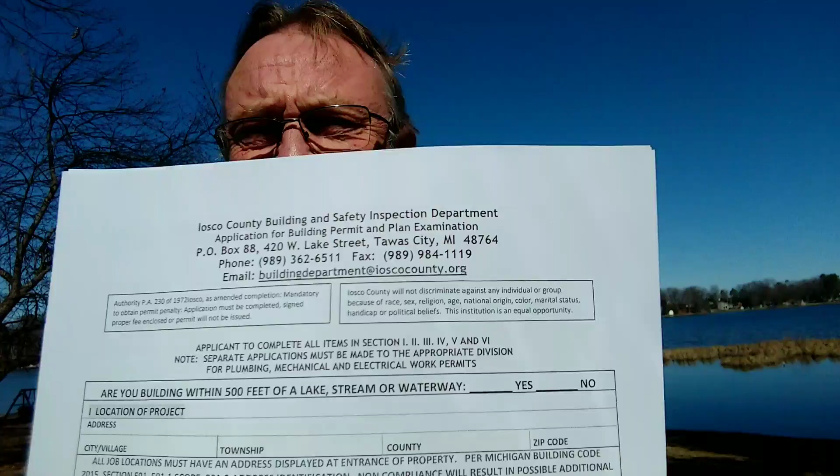So what we're going to talk about first here is the actual building permit. So this is what I got online, and it's from the county right here. And it asks you some various questions, all pretty simple. The address of where you're going to be doing the work. It's going to ask you if it's 500 feet from water, and it is. It's going to ask you who the contractor is. That's where you would put yourself if you're doing it DIY. The architect, yourself. The type of construction is going to be a deck, so on and so forth.

Now here's the one thing that I can warn you about, and that is I would strongly advise you against pulling a permit as a DIYer and having someone else do the work, because you remove all the liability from them and you put it all on you. So if something isn't done correctly, then it's kind of on you. Which is unfortunate, especially if they walk away because they made some mistakes and it's going to be too costly for them to come back and correct. So it's ill-advised to pull a permit for someone else to do work on your home. If they're licensed, let them do that, and then that puts the responsibility directly on them.

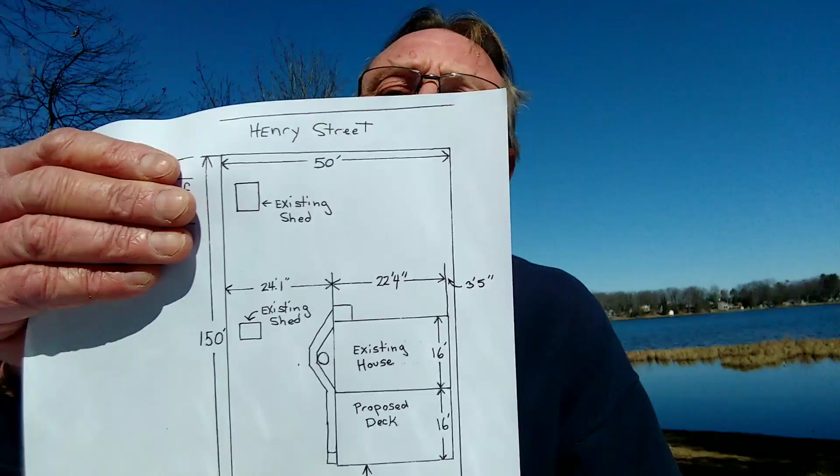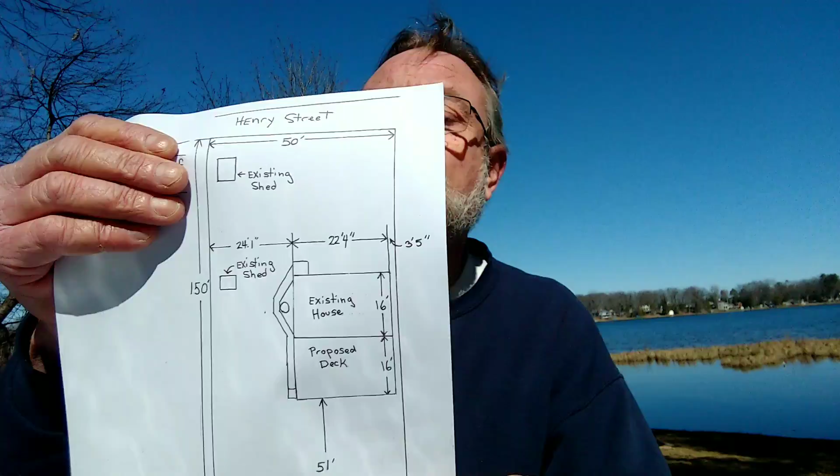So then the next thing that I did was I drew up a plot plan. And in the plot plan, it just shows the size of the property, the existing structures, which is the existing house, the existing sheds, and then the proposed deck, the distance of that deck from the water. The zoning says that I have to be 40 feet from the water, and when I'm finished, I'll actually still be 51 feet away from the water. And of course the width of the property and how far I am off of the property lines.

I'm doing this outside because it's a beautiful day, so the wind's messing me up a little bit.

But this is the general plot plan to show the length and the width of the property, how far off the property lines you are with your structures, and what you're proposing to do.

And that's really all there is to that. That is not drawn to any scale, and it doesn't need to be. There's no requirement that says any of these drawings have to be to scale. Some of them I did partially do in scale, but footings and stuff like that I did not.

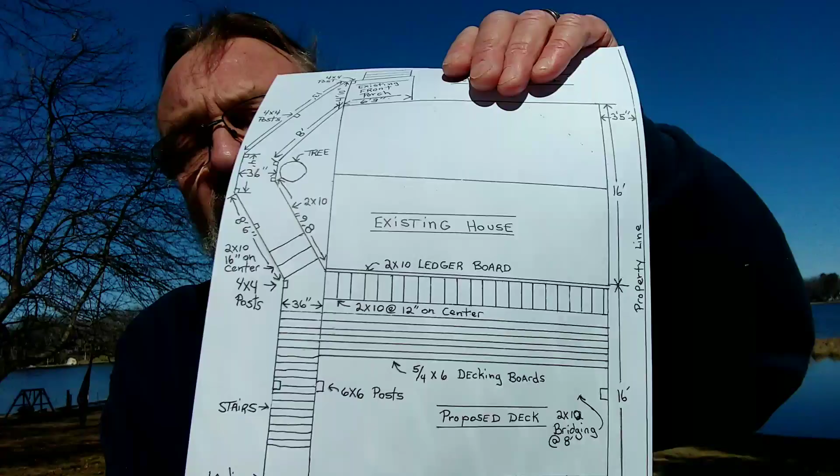So the next drawing that I did, and these will all have to be turned in to get the building permit, because it's going to show them how you are going to construct it and that it's safe for people to get on it. So the next drawing I did was the actual bones, or the main framework of the deck. And in that, I also showed them how the walkway was going to attach to my front porch. I have a tree right here that it has to go around.

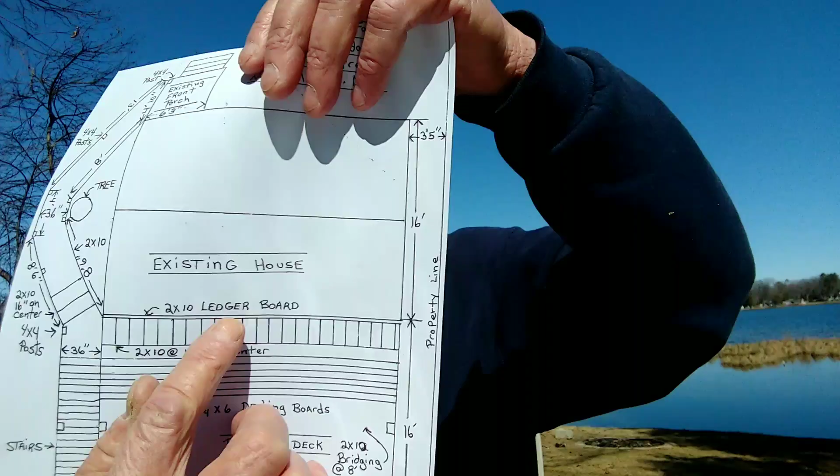I also show them here that I'm going to use a 2x10 ledger board fastened to the house. I'm going to use 2x10 joists at 12 inches apart. So if you're not sure, you can go Google different size timbers, such as 2x10s, 2x12s, and you can get what they recommend for their span, and that is pretty much a national code. It's not a state code. So in order for me to use a 2x10, I had to go 12 inches on center to span that

to 16 feet. Also keep in mind that wet weather timbers have a different span than dry timbers. So if this is a home construction, you can actually span a 2x10 further in a dry condition than you can in a wet condition. So keep that in mind if you're doing something like a deck or a proposed outdoor project.

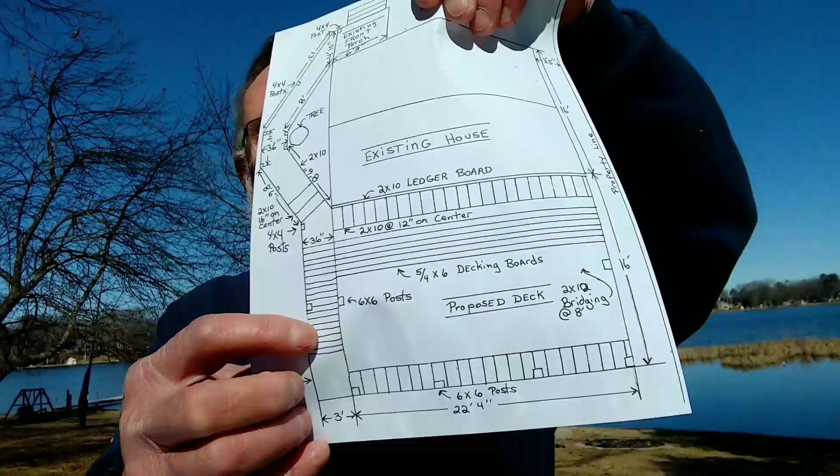Also in this drawing, I'm showing them where the stairs are going to be located, and I'm showing them the 6x6 posts that are going to support the deck and where they're located. I've also told them I'm going to put a 2x10 bridging between these 2x10 floor joists to stabilize them, keep them from trying to tilt one side to the other as the construction goes on. And I'll put them in the center between each one of these floor joists. So that's basically all this is showing.

So the tree that I have to deal with kind of changes the walkway. I wanted to run the walkway along the side of the house, but there's really just not enough room between the tree and the house. So I'm going to have to go out and around the tree. No big deal.

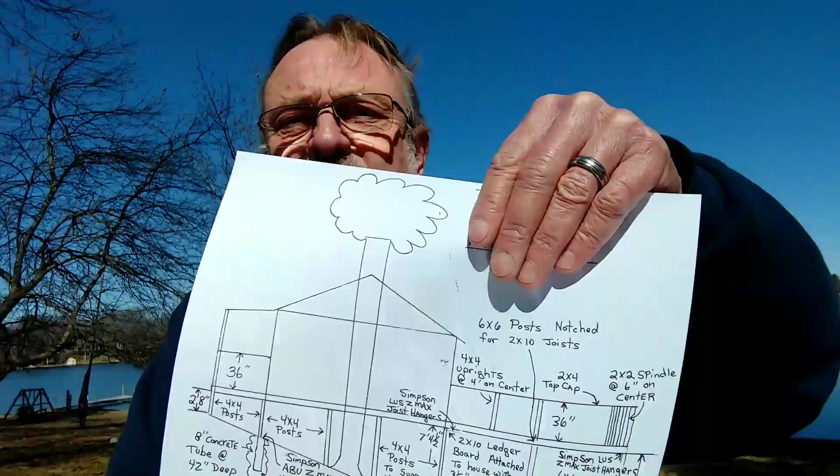The next drawing that I have for them is going to show more detail. So it's going to show that tree, and then it's going to show the 4x4 posts that are going to support the walkway coming from the front porch to the deck, this being the front porch. It's going to show my railing height at 36 inches. It's going to show my pier support dimensions and depth, which is 42 inches. And then it's going to show that I'm going to use a Simpson post base.

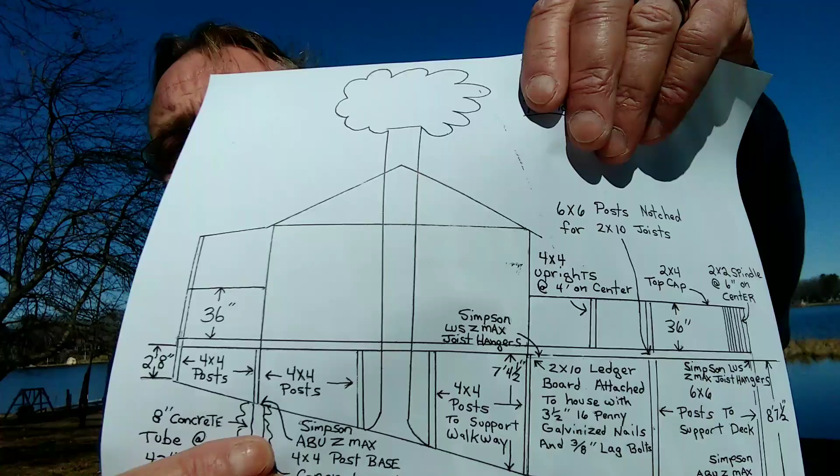I'm also going to use a 10-inch concrete sleeve. However, I might change that to an 8-inch, because your concrete piers need to be twice the size of the timber that is sitting on it. That's pretty much going to be typical anywhere you go. So if you're putting a 4x4, you're going to need an 8-inch concrete pier. If you're putting a 6x6, you're going to need a 12-inch concrete pier. I was thinking about using 10s here, but I may drop that down to an 8. It's more than adequate for what we want to do.

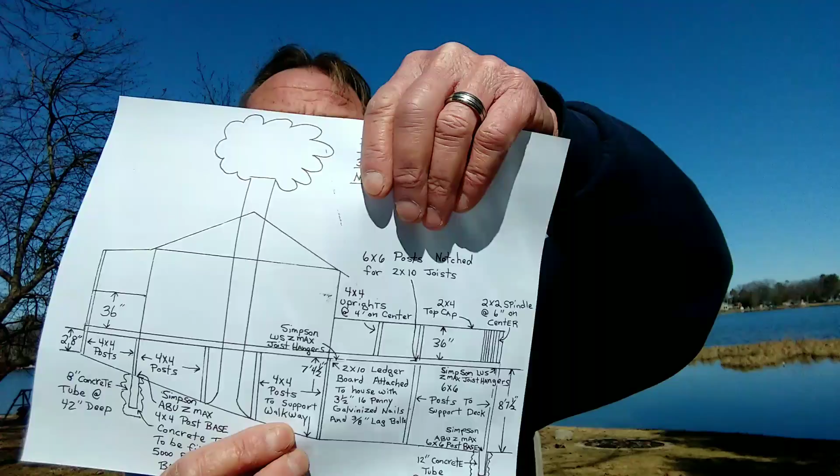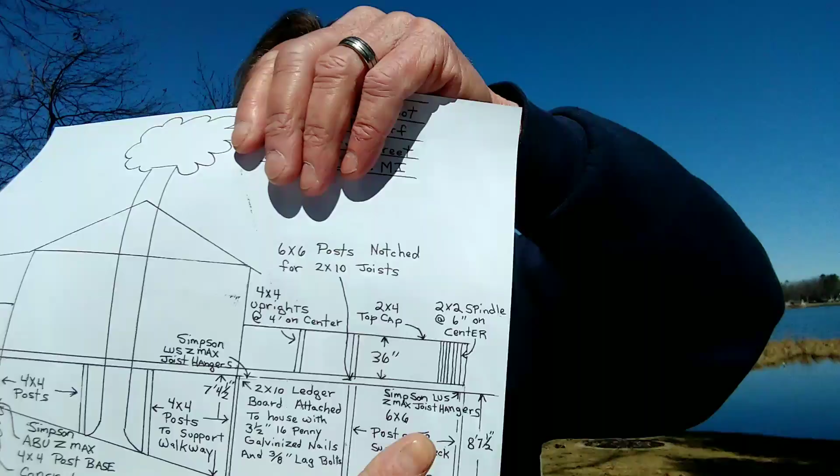So it shows the post base and all the post locations. Now this drawing is partially to scale, but the concrete piers are not drawn to scale. Everything else is, and this is a 1/4 inch equals 1 foot scale on this drawing. Also on this drawing here, I show that I'm going to use joist hangers on each end of these joists, off of the ledger board and off of the back side, where the ledger board is going to be here.

It also shows that I'm going to inset the 6x6s so that the 2x10s sit on the edge of them and aren't just nailed to them. They'll be cut out where they'll actually sit in, and the joist will be supported by the 6x6 on that ledge.

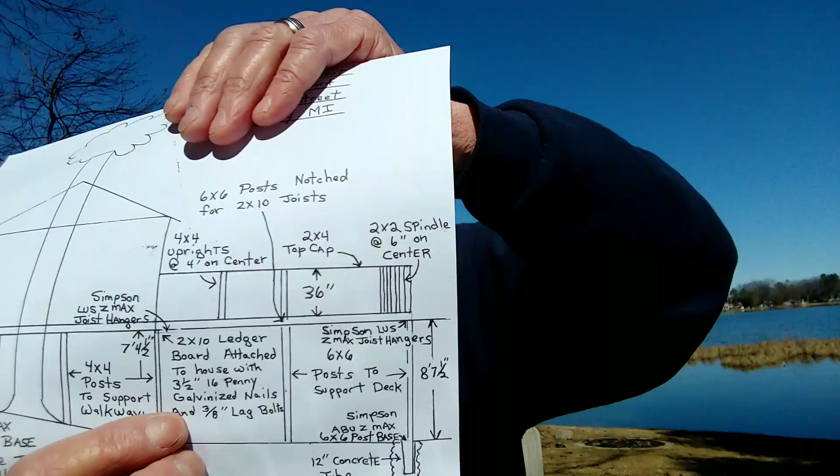So on this drawing we also show that the 2x10 ledger board will be attached to the house with 16 penny 3.5 inch galvanized nails and 3/8 inch lag bolts. We also show here that the railing will be 36 inches and that we'll have spindles between the rails every 6 inches on center. So it goes on to tell about the post sizes and so on and so forth, which I've done in the other drawing.

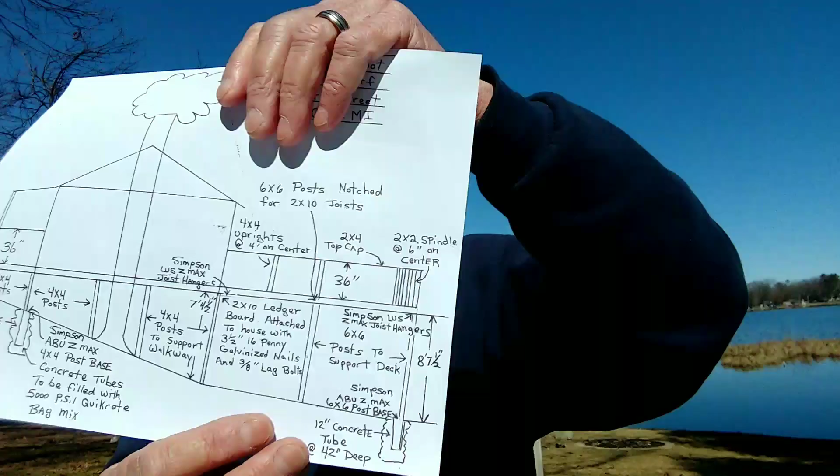But this gives them enough detail to know that the 42 inches footing depth is code. The 6x6s are a little bit overkill, and the reason that I'm doing that is because I may one day want to actually put a roof over the top of this deck. So I want to make sure that my footings and my posts are up to par for doing that one day. So then the last drawing that I have for them is the stair detail.

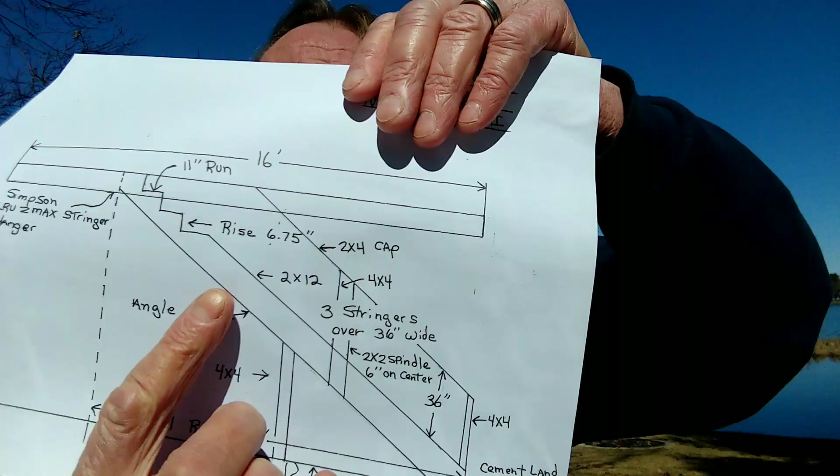So here's the last detail, and this is the stairs. Now, on here I've got the angle of the stairs, I've got the length of the run, and I've got the height of the rise, and I've got the total run. So the height of the railing, again, spindles 6 inches on center, 4x4 posts supporting them, 42 inch 8 inch pier, and then a 42 inch landing for the stairs to sit on.

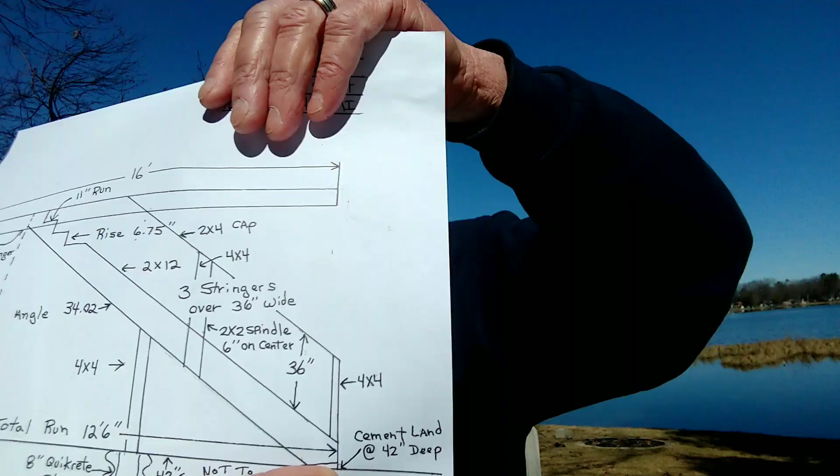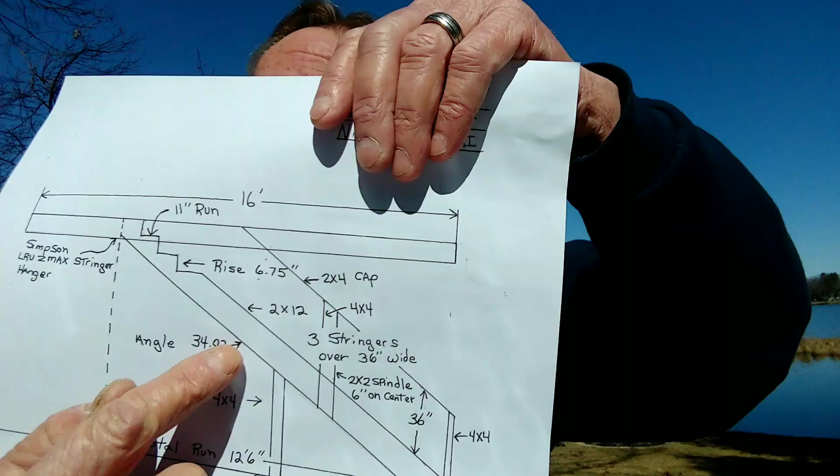I've also got the Simpson stair stringer hangers here. I'm also telling them that there's going to be 3 stringers wide, so 1 on each outside and 1 down the center. Now, if you don't know exactly the angle that your stair stringer is going to be, the run and the rise, there are stipulations for that, but you can buy a standard stair stringer at Home Depot. And I'll tell you a little secret.

What you do is it's cheaper. You go get you some 2x12s that you know are the right length, and then you go over to where the stair stringers are and you grab one and you lay it on your 2x12, pull your pen or your pencil out, and trace it onto your own 2x12. Then when you get it back to your project, all you have to do is cut it out, and voila, you've saved yourself a few bucks and you've got your stair stringer.

The pattern's right there at Home Depot, and nobody's going to stop you from grabbing a stair stringer, laying it down on your own board that you're going to purchase there and tracing the pattern onto it. It's a great idea. A buddy showed me that a few years back, and I never even thought about doing it. Save yourself 60, 70 bucks in doing that. So keep that in mind.

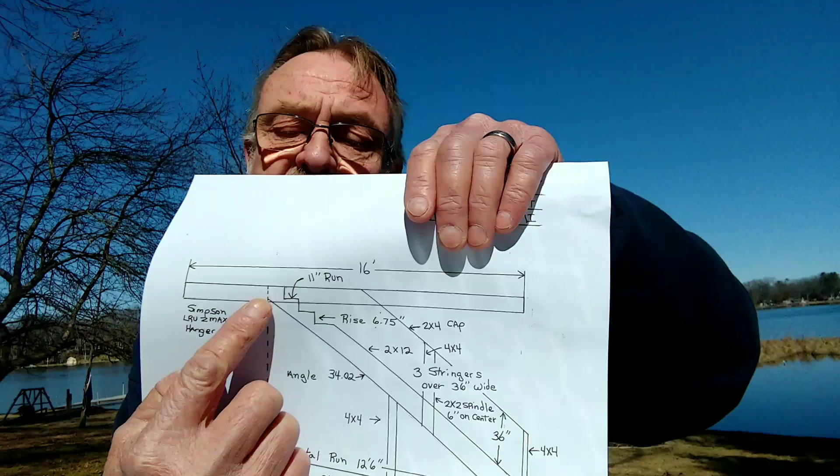If you do decide to do that, you can just write here that you're going to use a standard stair stringer from Home Depot or whatever. You still want to tell them that you're going to attach them with hangers, stringer hangers, and you're still going to want to tell them your railing height and all that, and your pier depth and all that good stuff. But you don't have to go into all that detail. So it's about as easy as that.